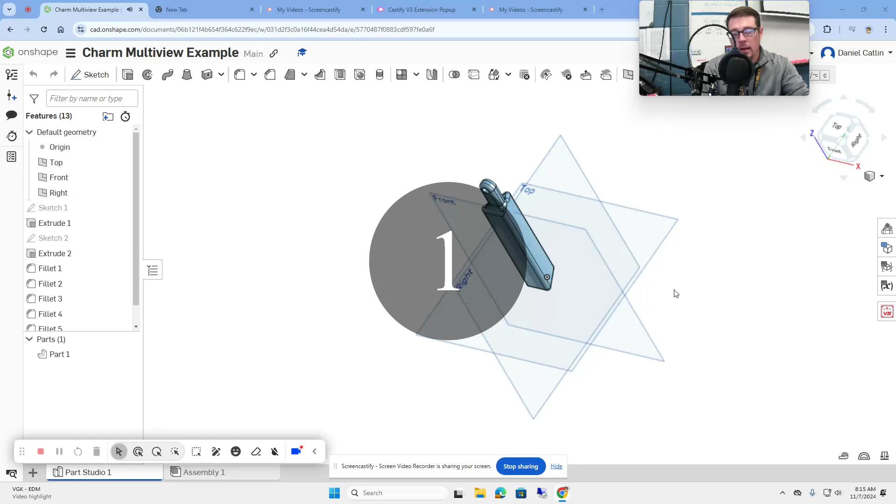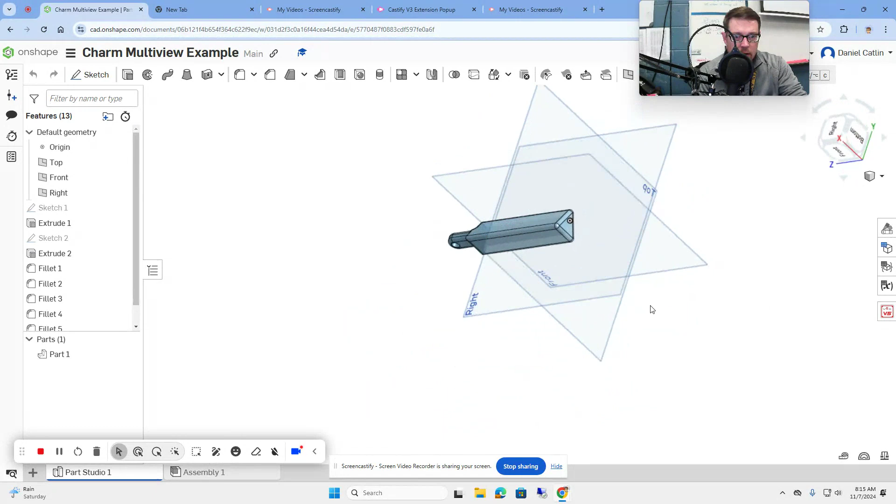Hey everybody, this is a video to help show you how to create a multi-view drawing from an isometric sketch that you've done in Onshape. Mr. Catlin here, just trying to help you walk through that process. So I have this little charm that I've designed. It's just kind of like a rectangular prism with a little hook attached at the end.

I'm going to show you how to make a multi-view drawing out of that because that's one of the things you have to do for your charm project. So here we go. Down here, next to your tabs for Part Studio and Assembly, you should find a little plus sign that will allow you to add different things. Let me get my toolbar out of the way here for a second so you can see more of those things. When I hit this, it's still in the way. Let's just throw it over here.

We are going to create a drawing. All right, so we've hit the plus button down here, and we're going to create a drawing now. Normally when this window pops up, I don't select anything that's on the screen. I just hit OK, and it seems to work for me. Apparently there are some options where you can automatically have the four views that you want, but I'm just going to have no views and make the views myself once I'm in there, and I'll walk you through how to do that.

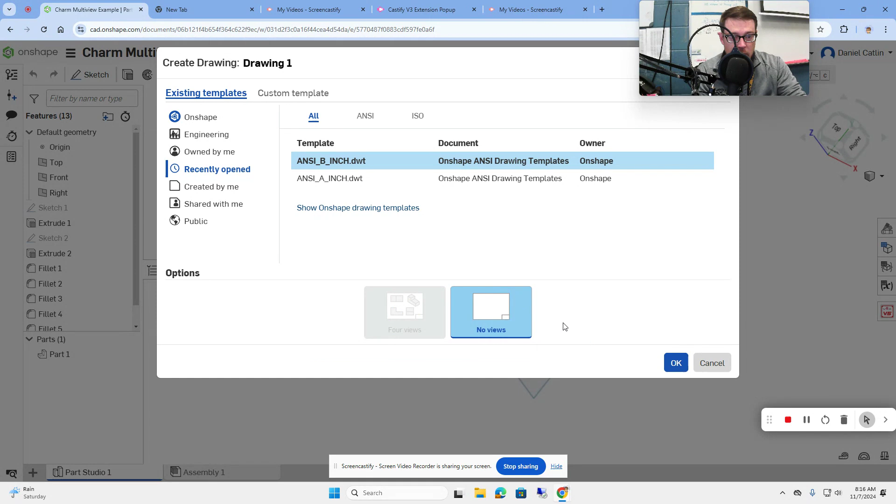I have noticed sometimes whenever this tries to create, it will have some issues about loading, like it'll say you can't establish this WebSocket connection or something from the editor. What I found that works best is to just come back and forth and spam it, keep trying to reload it until it shows up. So I'm going to pause this for a second, and hopefully I can get mine loaded up before too long, and you guys don't have to sit here and watch this spin. Sometimes it just takes a little while for it to work. I don't know why. There's probably some reasoning. If anybody can figure that out, let me know.

All right, so I'm back. I had to refresh and then open it back up, and it finally allowed me to see the multi-view drawing. You can see kind of the things we've seen from our multi-view sketches before. It has a lot of information down here that you can fill out, which we're not going to get into for this particular one, but you can see it has my name and today's date that I created the drawing.

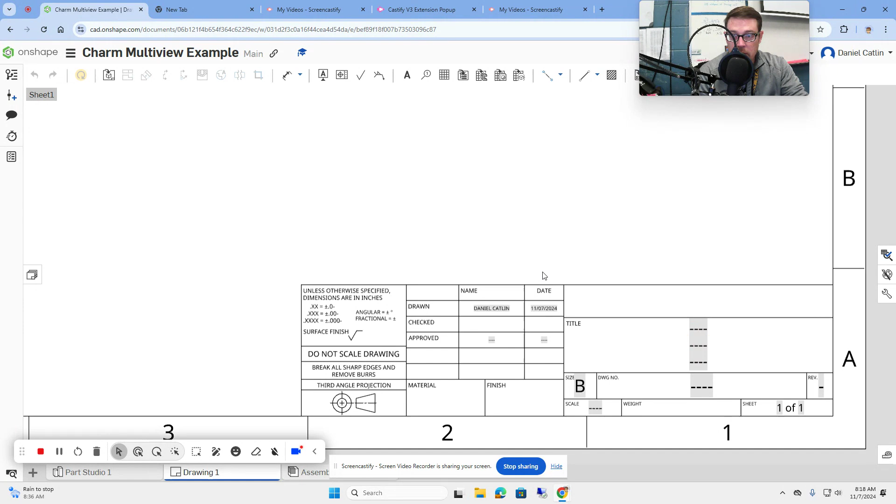If you've added material, like what you're using for the actual piece, you'll see that there. You could give it a title, which I want you to do for your multi-view drawing. I want you to give it a name, and then dimensions, which I'm going to show you also. So I'm going to try to move on with this so I don't run out of time.

After you get to this point, you want to insert some different views. The view we want to insert is, we've got to find the part we're dealing with. You should be able to find the current document you're working on because it's in your Part Studio. You should be able to find your part. I don't think it's going to be in an assembly—it's probably something you've just developed as one piece. Some of them might be parts you've put together because you've changed colors. That's fine, just get all the parts together in one.

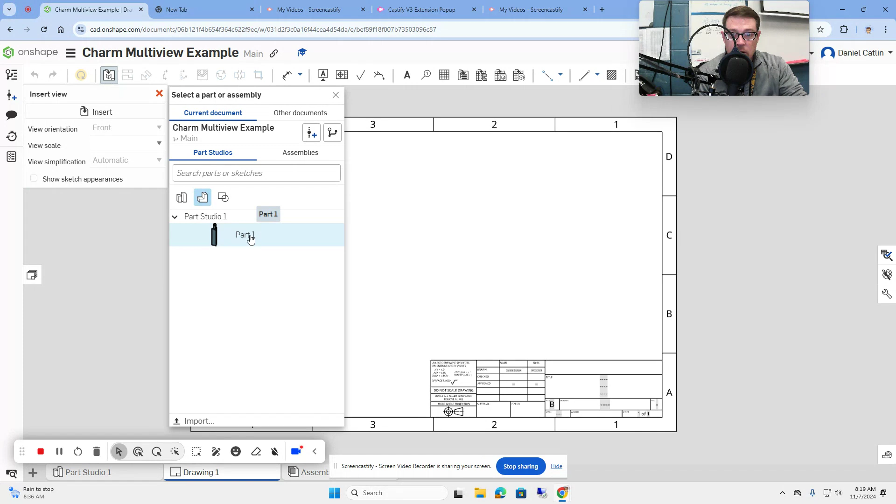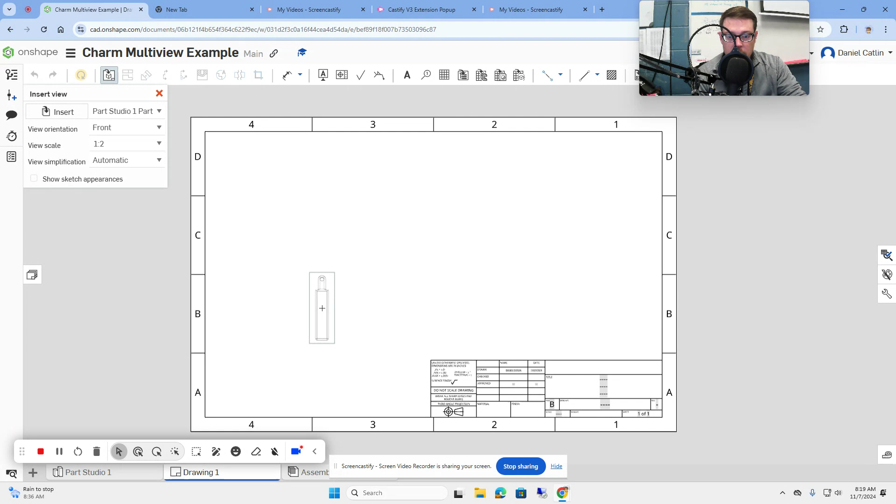Then what you're going to do is select that, and you'll notice that whenever you hover over here, it's going to show you one of your views. You want to make sure your front view is the one that shows the most information about your sketch, which is the one they're showing me right now. So this is my front view, and we know the front view is going to be in the bottom left-hand corner of our multi-view drawing, so I'm going to put that there. You'll notice it's gone there. Now if I hover upwards, you'll notice it will go straight above it and create the top view for you.

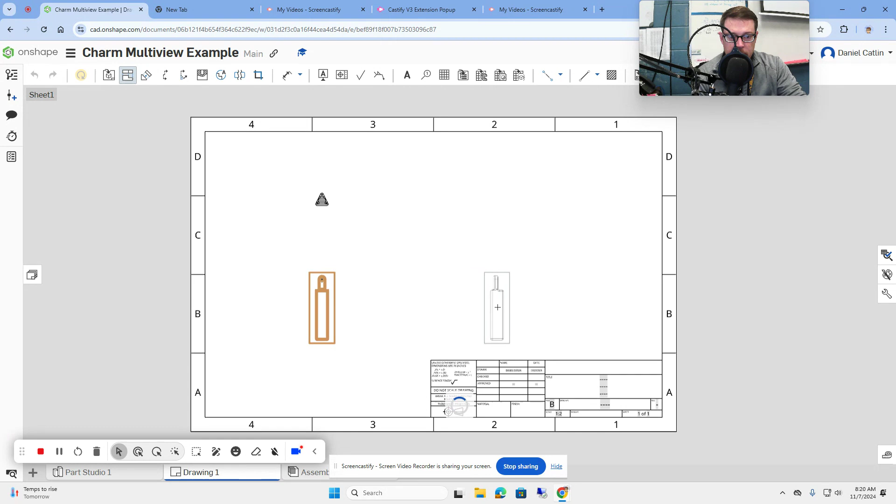So you can click that. And if you go straight out to the right from your drawing, you'll notice that it will do the side view for you. So we're going to go straight out, and we'll have our side view over here. Click that. Now you can also click on it again and come up to the corner, and you'll notice that it'll do a nice little isometric drawing for you.

And this looks just like our multi-view drawings do when we did them on paper, which is exactly what I want. Now besides getting your multi-view drawing and clicking down here to give it a name later, I also want you to do some dimensioning to it as well. That's part of your grade, right?

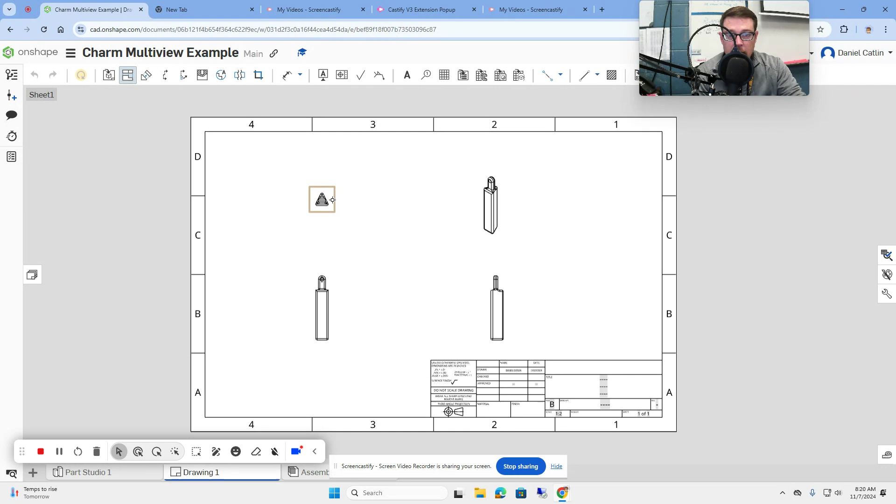But Onshape already has all your dimensions because you built it that way in the software. So you can zoom in nice and tight on the important aspects of your drawing, and just like you would dimension in Onshape for regular purposes, you can show off your dimensions for important pieces or aspects of your drawing.

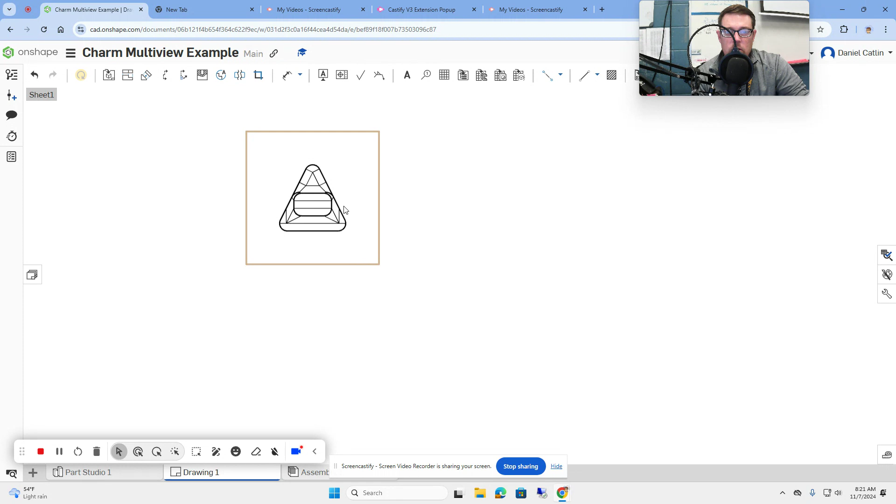So for instance, you could click on the top part of this and the bottom part of this, and you could show how tall it is from that section to that section. Actually, I don't like that one because it didn't have the very top of it, but you can get the idea. So show important dimensions by doing those clicks.

Mine's kind of complex, so I'm going to go to some basic ones that I could show on the front view. It might be a little easier for me. So I could click on this. I could click on the actual circle, right?

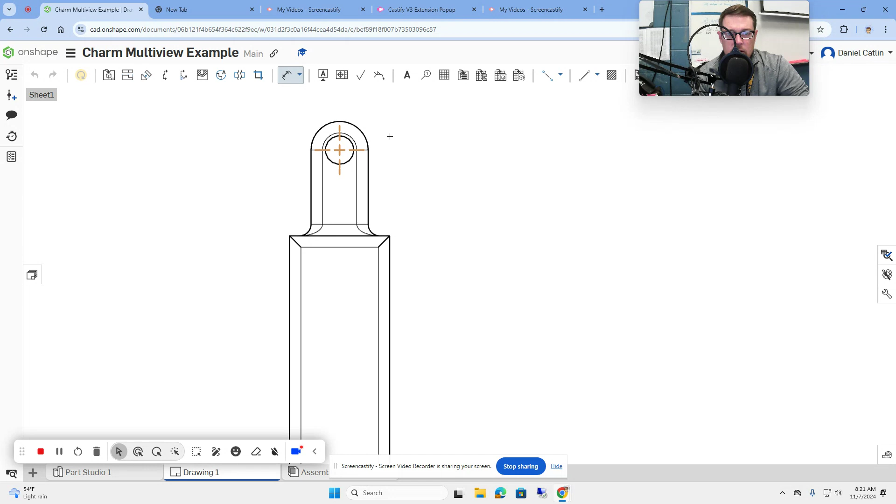And then I can bring that out and show you what the diameter of that is. Click it on the wrong parts - that's why I kind of have to zoom in to do those things. So let's click on the circle, and then we can show that its dimension is 1/4 of an inch.

And those are important parts of your constraints that you have as well, right? You could also come down here to the bottom, and I want to know how wide this is. That's kind of an important dimension, right? So hit some of your highlights on your dimensions.

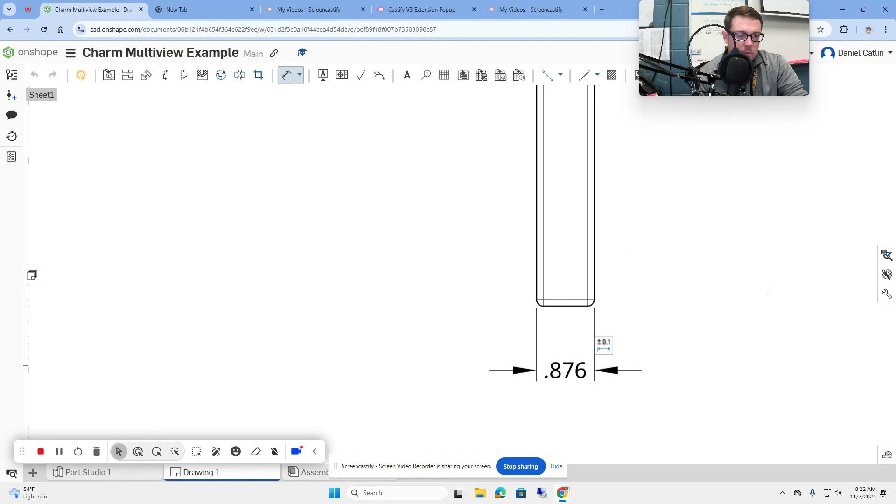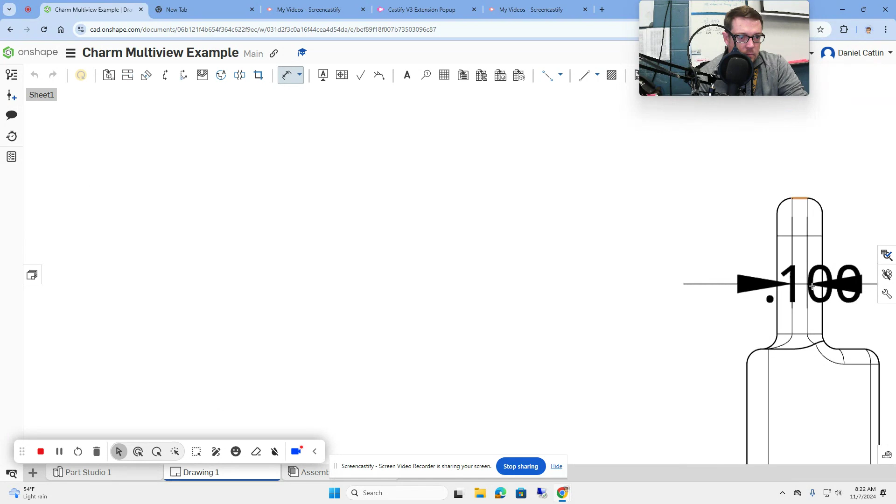I'd probably also like to know the height of this, which if you're running out of space and it's getting a little crowded, maybe go to another view and show it, right? So maybe you want to show the height of the whole thing over here by clicking on this line, and then at the very bottom, click on that line, and I can see that it's 4.5 inches tall.

Right, so kind of hit the highlights of the overall dimensions of your shape. Don't get dimension crazy, but the important parts for sure. Definitely you need your hole, your circle for your cutout, height, width, those basic things. And that'll be enough for our purposes.

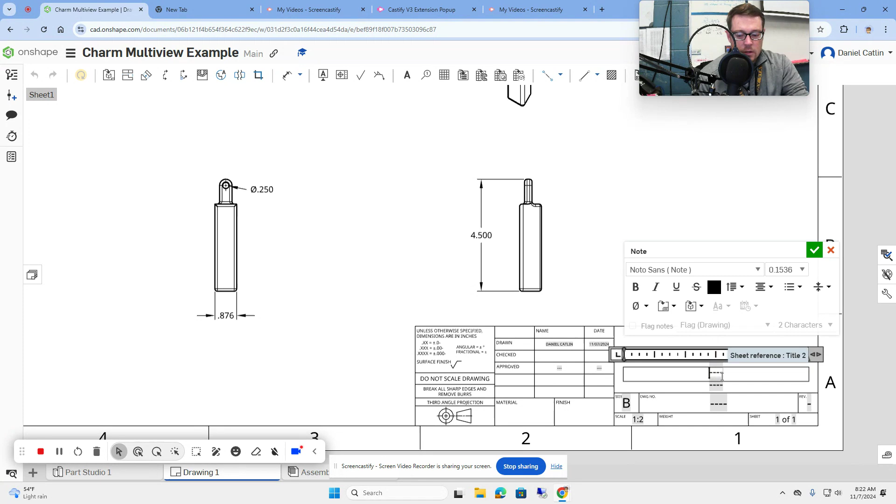And don't forget to come down here when you're done dimensioning and give it a title, right? So your title might be, you know, charm for Bob or whatever, right? So I'm just going to put Catlin Charm, and that way it has a title, a name, and that'll show up in the

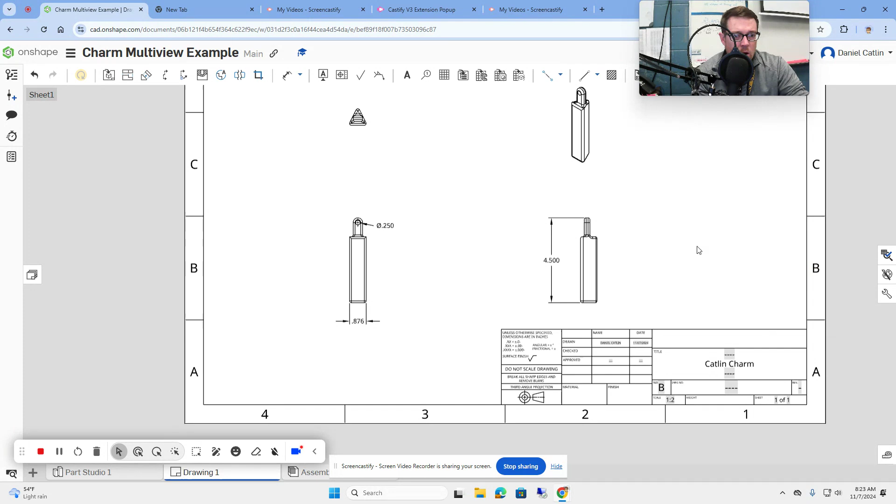printout. And that's all I need you guys to do for that multi-view drawing. Now this multi-view drawing, you can share it a couple different ways. You could do a screenshot of it with your Chromebook, you know, and show it off that way, or that has your name kind of up here in the corner to show that off.

Or you can actually export this by right-clicking on the drawing, and you can save it, and move it around that way. You can do different things with it, download it or share it that way as well. Probably the screenshot's going to be the easiest for you, just use your Chromebook. But that's all I got for you guys.

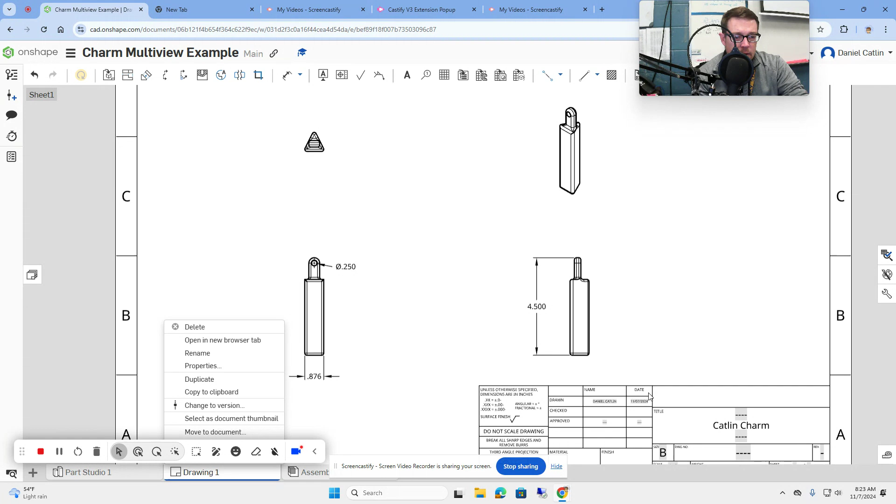But I need that multi-view drawing. It is part of your grade for your charm project. So do a good job of getting all 4 of your views named. Your name is the drawer, the date, all of the basic information, and don't forget your dimensions, at least a couple on each of your views.